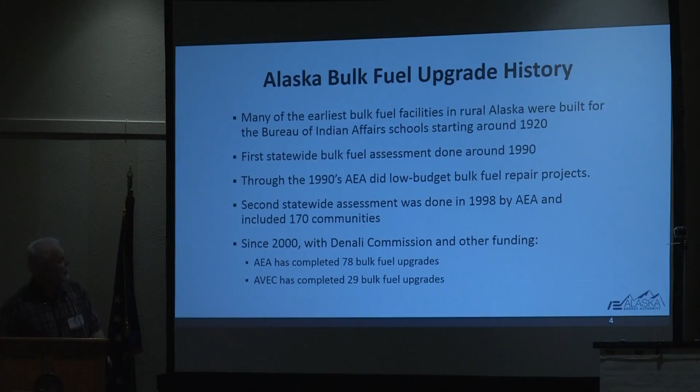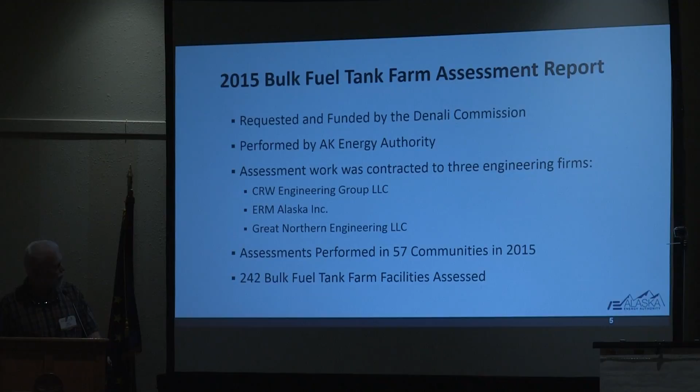So this assessment report that I mentioned, we worked with 3 Alaskan engineering firms. They went to 57 communities around the state, and there were 242 bulk fuel facilities that were assessed. So what I've done is I've got photos from some of these top facilities, and the following photo has got the list of deficiencies, but since there's a lot of people in the audience who are familiar with tank farms, Mark, and others of you, Sandy, I'm wondering if anybody can tell me anything about this tank farm facility. No secondary containment. Anybody want to take a guess at how old that tank is? There's actually some clues in the picture.

60 years? I think it's probably older than that. It's actually probably older than that because in the US, welding was really introduced in the early 1900s, and they started converting railroad tank cars from riveted to welded in about 1920. So those tanks might be 90 years old. And they leak. And they have a variety of other deficiencies. Anybody else want to guess at some other deficiencies you see? Yep, emergency venting's not there. Exactly. Good call. All right. Well, here's the list. And this is not everything, but it's just kind of the primary things.

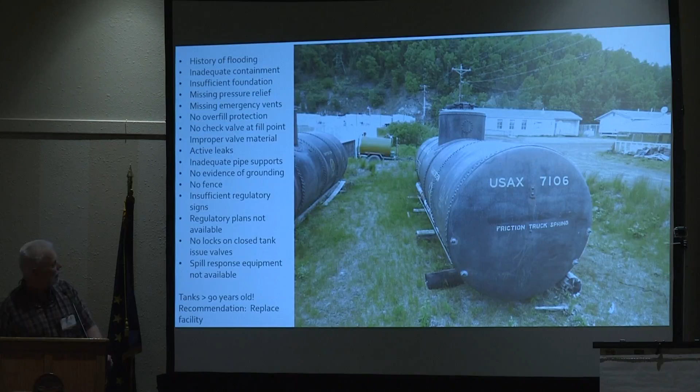So here's another one. Anybody got any guesses? By the way, those are the BIA tanks I was talking about. I don't know if you can tell from there, but you can kind of tell that those tanks are slightly different sizes because they were delivered nested together, probably in the mid-1900s. Any guesses out there? Pardon? No, yeah, the containment's not there. The venting's probably not up to code. The fence doesn't look like it meets code.

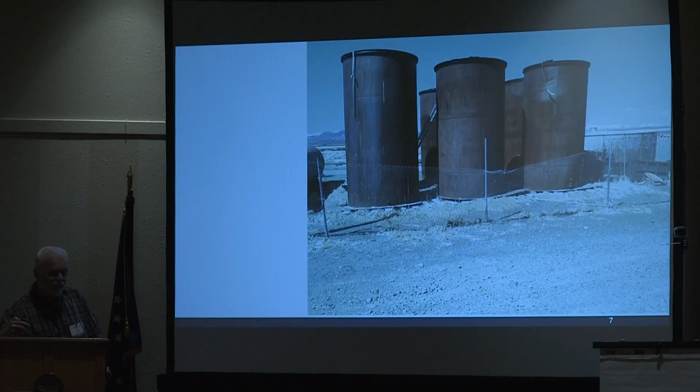Let's see what the list looks like. Oh, it's another long one. History of flooding. Threatened by coastal erosion. No secondary containment. No tank foundations. Well, actually, I think I see some cribbing under those tanks, but if the cribbing's, yeah, it's 100 years old, but there's also a standard for the thickness of the cribbing. Mark, you remember what it is? Is it 12 inches? Yeah. So, yeah, and they're not anchored.

Amazingly enough, we have not seen many tall, skinny tanks that actually blew over or fell over, probably because most of them have fuel in them. But it's always a risk and something to consider when you're rehabilitating a tank farm. This one had active leaks, excessive tank corrosion, a lot of the same issues that the last one did. And the recommendation was to replace the facility.

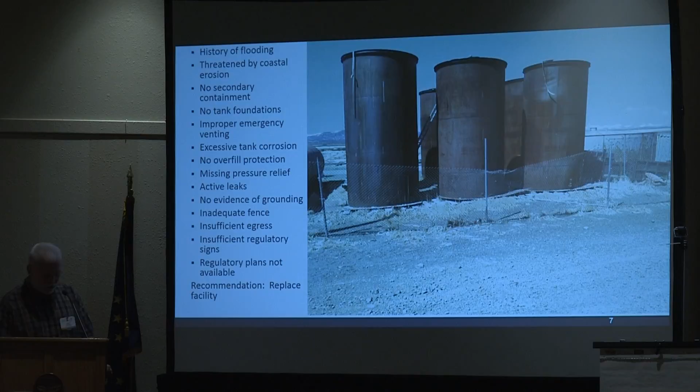Does anybody sense a theme here? Yes, ma'am. The anchorage? Oh, egress. Oh, yeah, there's actually a requirement when you have a fenced facility that you have two places where you can get out of it. Let's just say you're working in a tank farm. Maybe there's a spill and the fuel catches fire. If it's between you and the exit, you've got a problem. So there's a requirement that there be two ways of getting out of the fenced-in area.

Any other questions? Okay. Well, you can see these are similar types of tanks, similar issues. It's kind of hard to tell from here, but the secondary containment is not holding water there or holding liquid, and no fence. The venting looks like there's normal venting, but not emergency venting on those tanks. Let's see what the list looks like.

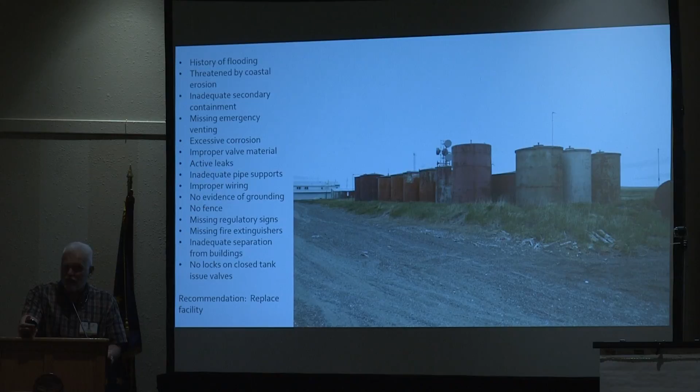Oh, another long one. History of flooding, threatened by coastal erosion, inadequate secondary containment, inadequate separation from buildings, no evidence of grounding. That's on the electrical system, and of course grounding's critical so that you don't get sparks. Recommendation is to replace the facility.

That's kind of a small photo, but actually this is one of the more interesting ones. Can you guys see how the pipes are connected there to the red manifolding? Anybody know what that's called? Those fittings? I call them irrigation fittings because they're like a sprinkler system. But it's called a Victaulic fitting. And the ends of the pipe are flared, and then there's a rubber seal inside of that clamp that goes around the flared pipe ends, and those things always leak.

In fact, they kind of act like flex fittings, because if you put a little bit of stress on the pipe it bends right there, and then it leaks more. And you don't see very many Victaulic fittings anymore, but it's just guaranteed leaks in a manifold system. There's also something interesting about that valve. Anybody notice anything about that valve?

Yep, it's brass or bronze, which means that it melts at temperatures below the temperatures you can get in a pool fire inside of a tank farm facility. So it's a code violation, because if there were a fire there and that valve melted, then all the fuel inside the tank would be released. I don't know if you can see it very well, but there's a 2x4 holding up a pipe towards the back, so inadequate pipe supports, and I believe the secondary containment on this one was compromised. Let's see. Yep.

There's a DEC requirement that bulk fuel facilities have to be more than 100 feet from a public well. I don't think there's a requirement for distance from a residential well, but in any case, this one was within 100 feet of a public well. Inadequate secondary containment, active leaks, missing fire extinguishers, spill response equipment not available, recommendation to replace the facility. I've only got a couple more of these.

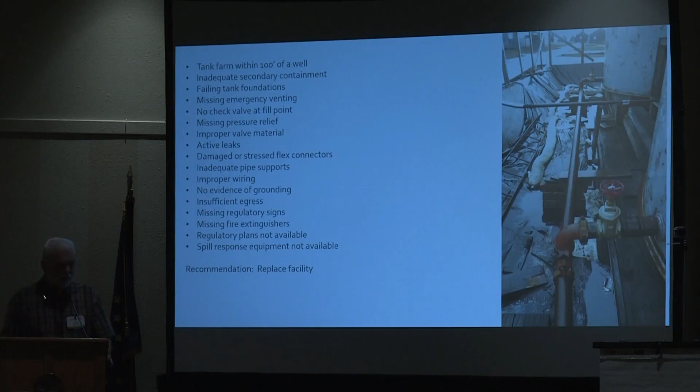Anybody see anything in that one? Those tanks look a little bit better, although there's one that's got a big dent in it, which is also not uncommon. Tanks get moved around in the villages.

What jumps out at me is the foundation on that white horizontal tank in the front. It's really important to keep tanks off the ground, because if you set them on the ground, the bottom will rust. And there's also code requirements for adequate foundations on the tanks. Inadequate secondary containment, failing tank foundation, missing emergency vents, active leaks, a lot of the same things we saw in

the other ones. Was there a comment back there? Okay.

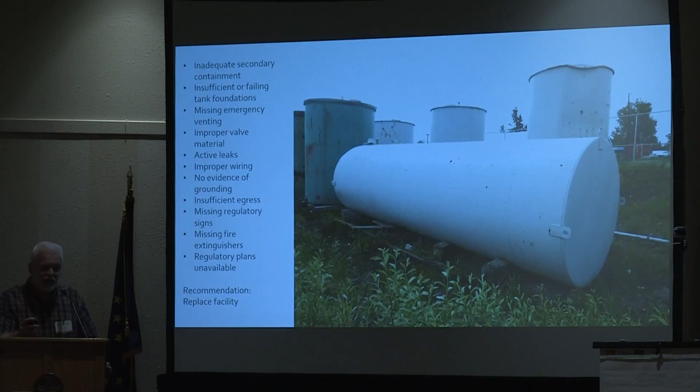And the recommendation was to replace the facility. Okay, I think this is the last one. You can see same kinds of issues with the foundation. The tank's not properly supported. Looks to me like there's no emergency venting.

And having a hose permanently connected like that, it probably means the hose is full of fuel. And when hoses are left out in the sun, they don't last years and years like piping will. So that's an issue and a concern right there.

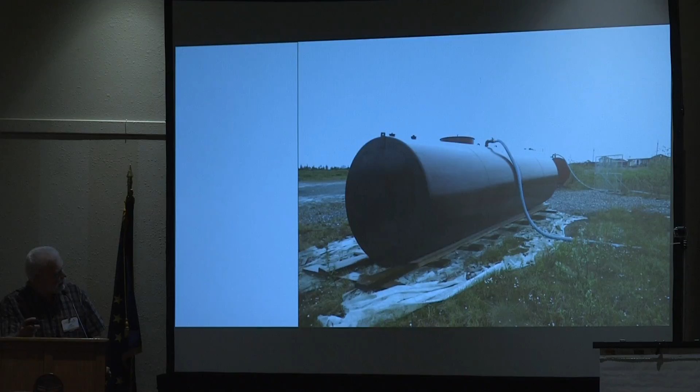This one, I believe, was next to an airport in an interior village, so they get fuel by air. The good thing about that is you need less storage because it doesn't have to be year-round.

Was there a question or comment there? I don't actually remember which community that was.

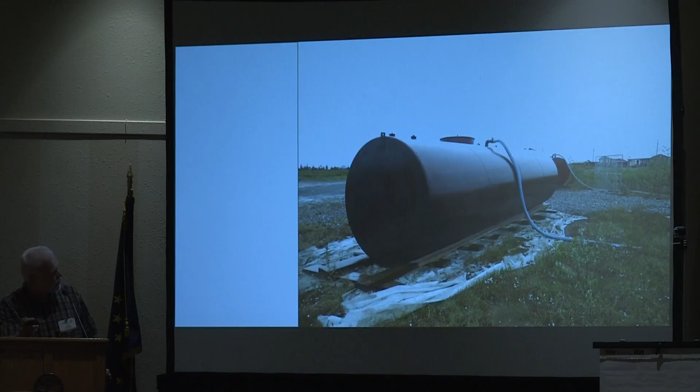But there's two tanks here next to the airport. One's gasoline, one's diesel. And a similar long list of deficiencies. A lot of the ones you've seen before: improper valve material, missing regulatory documents, rubber hose in long-term use, and the recommendation was to replace the facility.

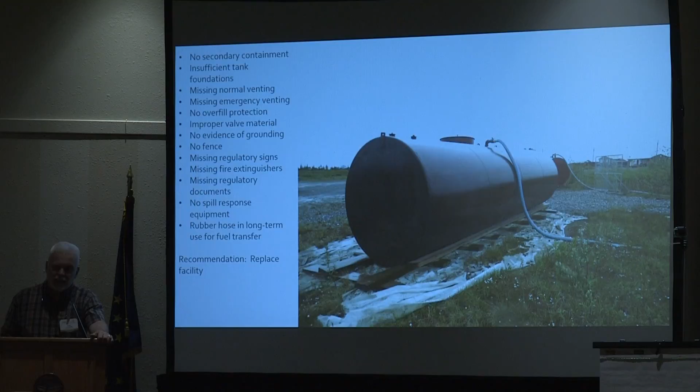I see Mark smiling over there. He's probably seen this kind of thing before.

All right, I wanted to show you how we added up the points in the assessment reports. And a lot of these points are related to code issues, and then some of them are related to safety issues. They're also related to a lot of the common deficiencies we see in bulk fuel facilities.

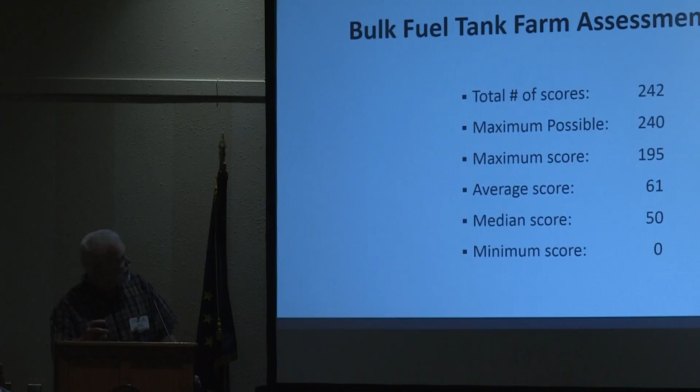The maximum points was 240. Here's the scoring from the facilities that we looked at. We had 242 bulk fuel facilities. Maximum possible score was 240. The maximum score we found was 195. Average was 61, median was 50. Now there's actually some good news there, because what that means with a median of 50 and a maximum score of 195 is there's a lot of the facilities that don't need to be replaced, which is kind of going to lead into the next presentation.

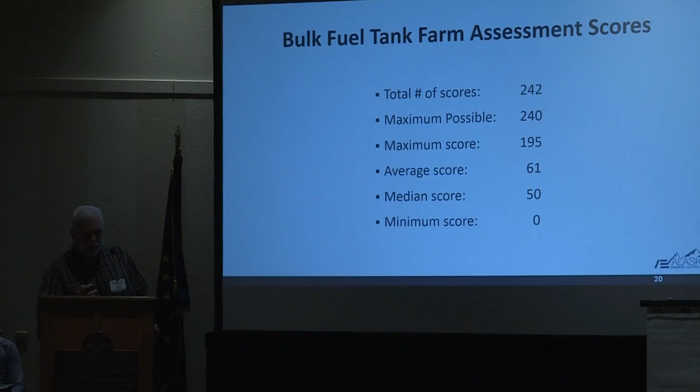All right, let's see. So of the 57 communities we looked at and 242 facilities, there were 39 facilities where the consultant recommended replacing them, and 66 of them were environmentally threatened. And that's probably a soft number because, as you know, climate change is impacting bulk fuel facilities all over the state, all kinds of infrastructure all over the state, and we're not quite sure how quickly things are going to change.

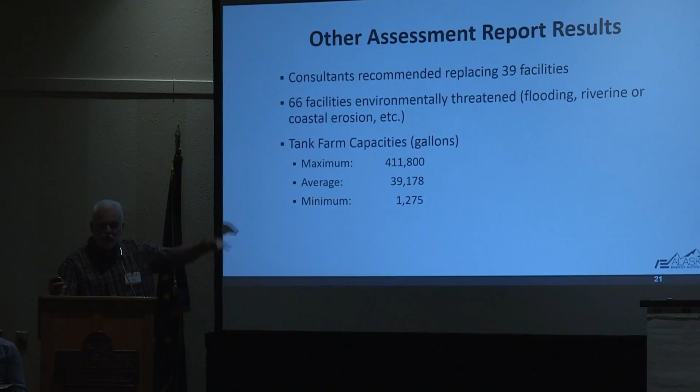And then the range of capacities we looked at was a minimum of 1,275 gallons, maximum of 412,000. So that range is the minimum size that EPA regulates, and the maximum is the threshold beyond which you run into DEC contingency plan requirements. And we don't typically get involved in facilities above that threshold.